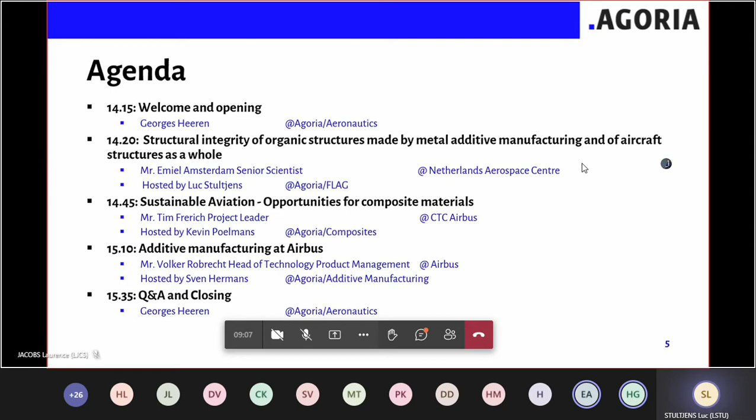The Flemish Aerospace Group is an innovative cluster of about 75 members, split over educational institutes, centers of knowledge, and small, medium, and large enterprises. Our ecosystem varies from niche consulting firms to tier 1 manufacturers. Our members are active in structures and systems, engines, and airport and ground support. If you're interested in joining our business group, our contact details are on the last page of the presentation.

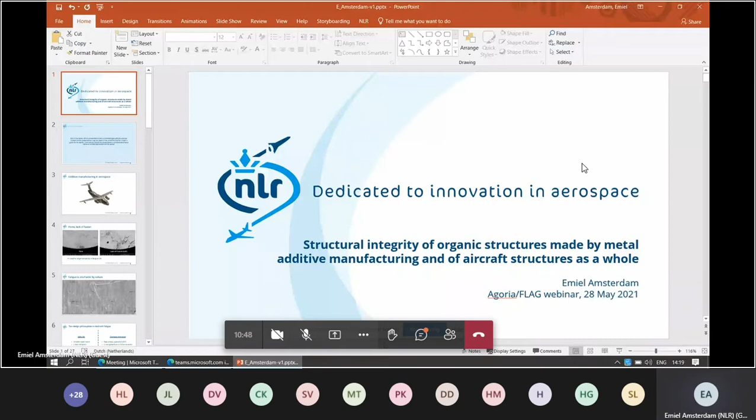The title of the presentation is Structural Integrity of Organic Structures Made by Additive Manufacturing, and of Aircraft Structures as a Whole. As most people will know, this is our release statement.

Additive manufacturing is growing in popularity, especially in aerospace, because of the lightweight opportunities it provides, and also the opportunity to create parts with added value. Those are the things that are most interesting for additive manufacturing, because we're not going to print an entire plane. Instead, we're going to make parts of an aircraft that have added value, using a technique that is more expensive than conventional manufacturing, but which lets you create additional lightweight benefits or added functionality to a product.

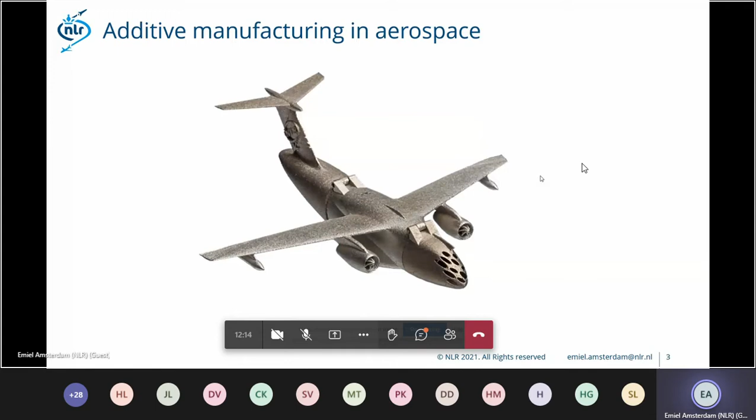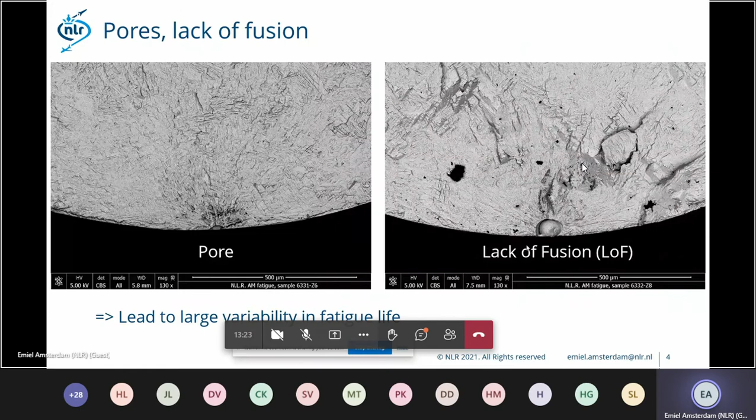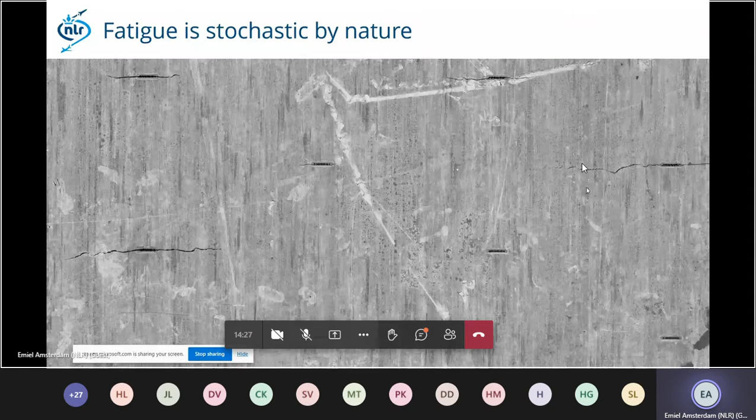So how do we deal with fatigue in conventional design approaches? We can use safe life, or we can use damage tolerance. Safe life, I think one of the first design methodologies, is where you usually look at crack initiation, and then if the crack has initiated, that's the end of the life of the component. You use some kind of safety factor to ensure that the part doesn't fail in service, and from the mean life of the SN curve, you create a safe curve for the design. You typically use smooth specimens to determine the SN curve, that's the cycles versus stress curve, to design the component, and Miner's rule is used for variable amplitude fatigue.

However, in the past there were still fatigue failures in aerospace, and it was recognized that although there were some factors of safety, that safety was not always guaranteed. So already at the beginning of the 70s, they came up with a damage tolerance design philosophy, where they assume that there is a flaw already present in the material and in the structure, and that it grows, and that it grows at a critical location.

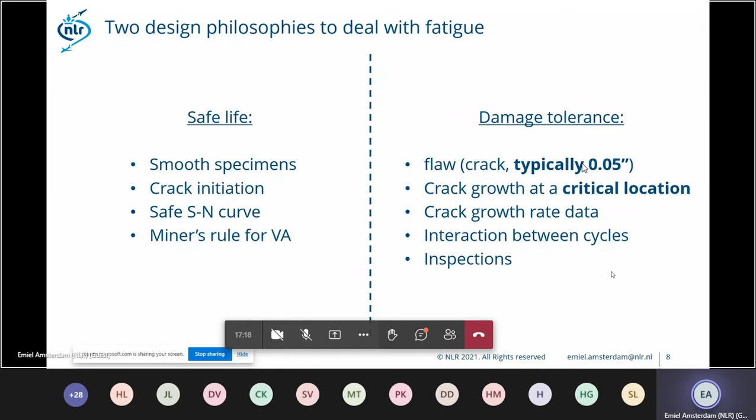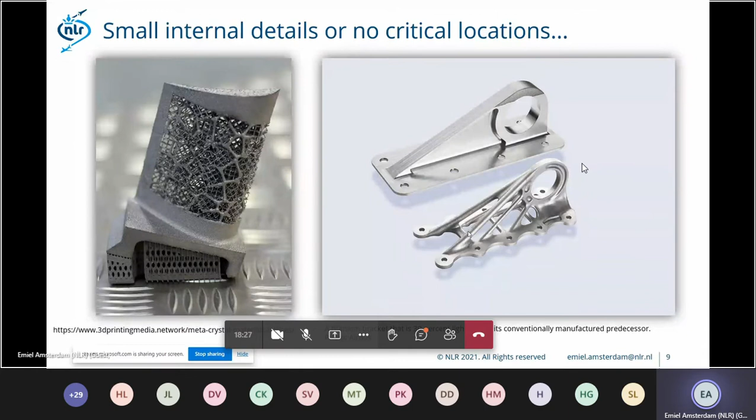And then how are you going to use your damage tolerance approach if there is no critical location? Obviously, for applications with multiple load cases, this does not hold, because you have to have material at one place for one load case and at another location for another load case.

So in reality, you won't end up with a part with equal stress everywhere, but still the critical locations are not always very obvious. Whereas in other designs, where you have a hole or something, it's more obvious that around the hole is a critical location. So how do we deal with that?

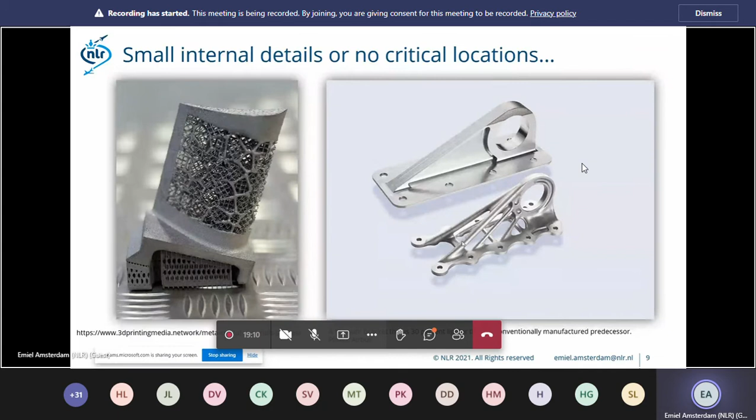So that's basically the question: which design rules should we implement in topology optimization algorithms such that the optimized shape is damage tolerant?

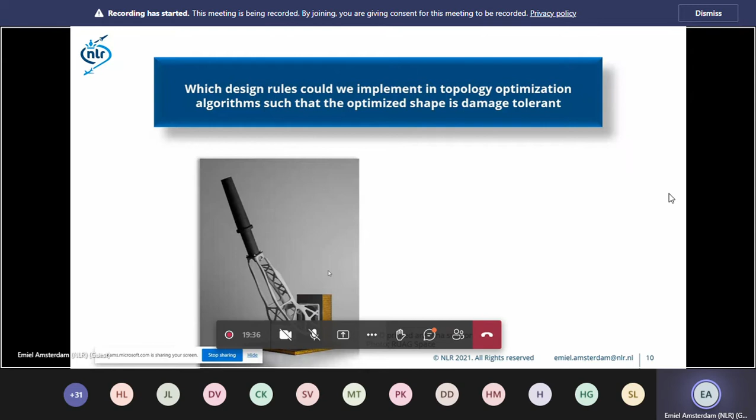And here you can see an antenna. How do you basically guarantee that such a structure, if one of these connections fails, you don't get sudden collapse of the entire structure? For example, if you look at this, you would want to have a structure which is more like the game of Jenga, instead of a house of cards, where if one member fails, you get collapse of the entire structure.

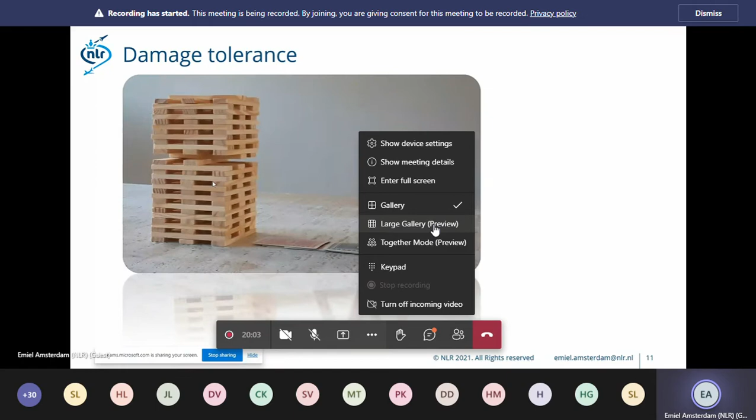But you would like a structure that is more damage tolerant in a broader perspective. When we speak about damage tolerance, we have these characteristics of a critical location and a 1.27 millimeter assumption for a starter crack. But if you look at the broader perspective, damage tolerance is also about how good a structure is at dealing with damage that is inflicted or introduced in the structure. So for additive manufacturing, we would like to have a structure which is more like the game of Jenga, where we can introduce some damage and nothing happens to the structure.

Same applies for the other structure. Here you can see a lattice structure inside, in this case an open lattice structure inside a compressor blade, as an example. How can you ensure that widespread fatigue damage isn't everywhere and then you get sudden failure by linking up of all these

damage accumulation. So is this something that can happen? Here you can see an example of this in a real case structure, an aircraft structure, where there was multiple site damage, and it linked up after many pressure cycles in the cabin. Famous incident.

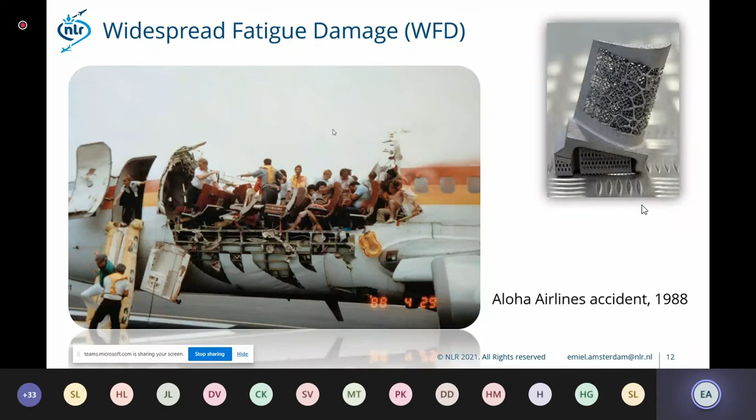So how can we deal with that? To investigate that, we looked at fatigue in stretch-dominated multiple load path structures. This was a master thesis project for a student that was at NLR. And we started with a very simple structure, because we could immediately go to a very complex structure, but we can't learn that much from it.

So we want to start with a simple geometry, which is stretch dominated. And if one member or one strut fails, then the structure is still stretch dominated, because all the members are in tension.

So for this example, we looked at 3 different specimen geometries: one with a single strut, one specimen with 9 struts in parallel, and one with 81 struts in parallel. And they all have an equal cross-sectional area, so the force is the same.

So that's what we want to investigate: how good is the structure in maintaining that force over a long period of cycles? And they also have equal surface area.

As I mentioned before, fatigue is a stochastic process, so usually fatigue cracks start at the surface, and especially for additive manufacturing they start at the surface. And if you have more surface, there are more possibilities for cracks to initiate. So fatigue life is also a function of the area, the surface area of a specimen.

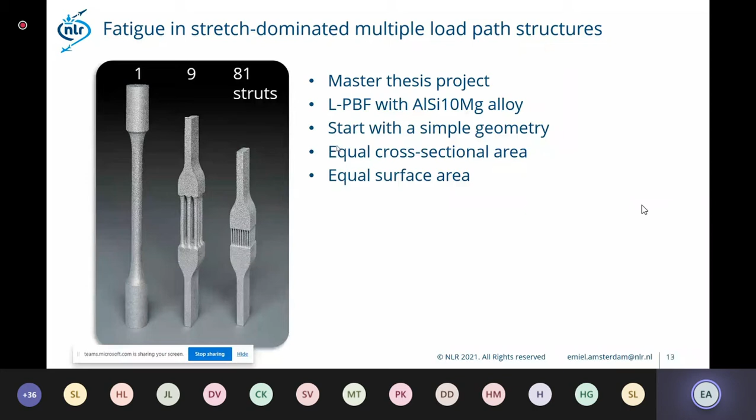So we tested these in fatigue, and these are the results. Here you can see the normalized cycles to failure. We normalized all the results by the average of the single struts at 140 megapascal maximum stress. Here are the results: the number of cycles to failure on the vertical axis and the maximum stress on the horizontal axis. As the maximum stress increases, the number of cycles to failure goes down, as expected.

But these are the results for the single struts, and we see that the results for the 9 struts specimens are decreasing, and that's quite a remarkable result—that the life, if we increase the number of struts, the life decreases, and if we go to 81 struts, it even decreases more.

While the load on all the specimens and the cross-sectional area is the same, as I mentioned before, that's remarkable. Here you can also see that for the single strut specimens, 3 results are almost the same, but there is some scatter—occasionally there is one specimen with an extra low life.

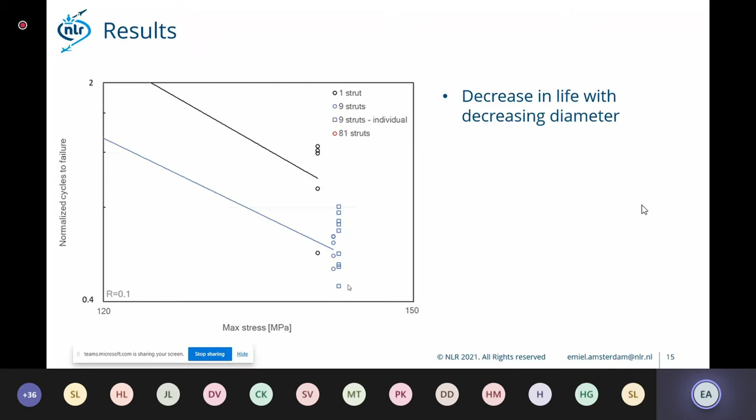What can also be noticed is that the average life of the redundant structure, the 9 strut specimen, is slightly lower than the average of the single struts, and the scatter is lower. That's also something that you would expect.

So in the 9 strut geometry, if one strut fails early, then the entire specimen doesn't fail yet, but the load on the 8 remaining members is increased, and with that increased load, the fatigue life decreases. So it is expected that the fatigue life of the 9 strut geometry is slightly lower than the average of the individual members, but also the scatter decreases due to this load sharing.

So this is what we would expect if we use a redundant structure, that the scatter is much less because the load is shared once one member is failing.

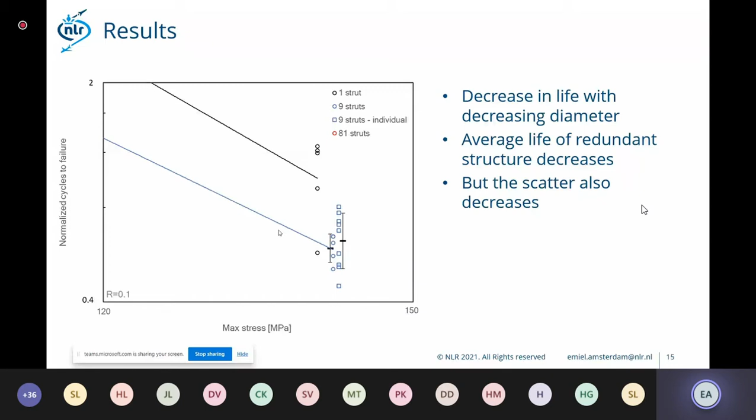So this is already a good result, but we still have the difference in life between the different diameters. That's something that we have to investigate further.

This is done in a project which starts in September by another student, and he will investigate the origin of the size effects for additive manufactured materials and conventional materials.

And we use other alloys, and we use complexer structures, so that in the end we have some design rules which would guarantee such a structure as this antenna, that it's damage tolerant. So if, for example, this very small strut is missing, that it does not lead to direct failure of the entire structure.

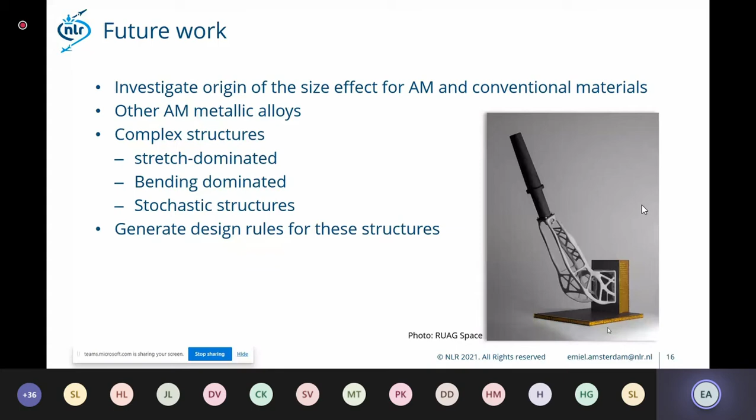So that's also what we, for the additive manufacturing and components, consider - those things of damage tolerance and how do you design for it.

It's also a similar topic for the aircraft structure as a whole, because in the future we expect that the structure will be more organic, and we use also shape optimization software for those entire structures. So it's basically a similar problem, but on a large scale.

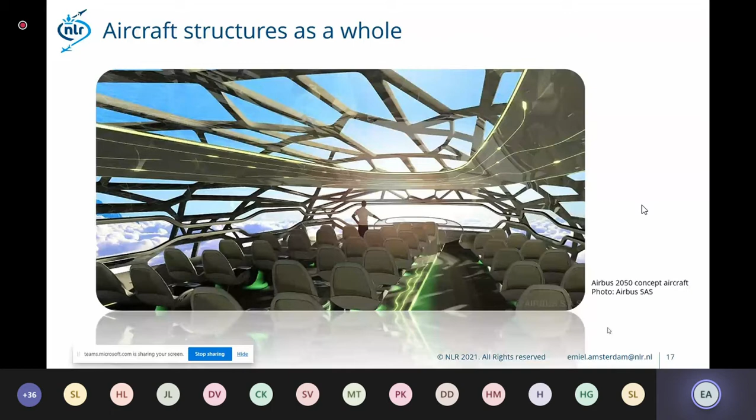So we have some factors that are also influencing the damage tolerance philosophy for large scale structures. One of those is indeed the introduction of additive manufacturing, of new production techniques.

The other one is the increased use of optimization tools, and you can see that also in the EU calls. The push to circularity, both on resources, materials, but also on CO2 emissions.

And there is still a push to lighter aircraft structures. That's also seen in the clean aviation strategy.

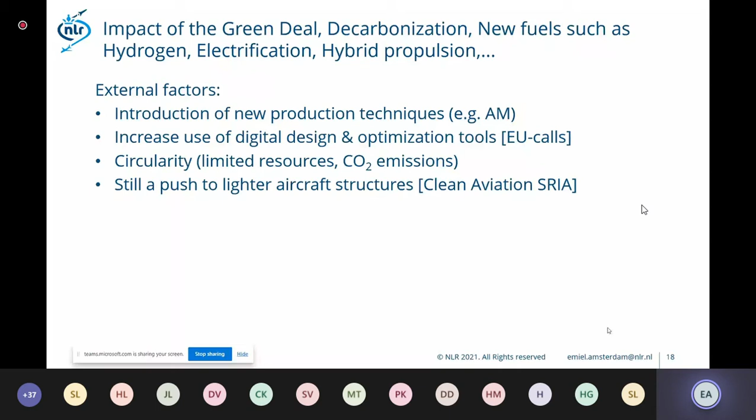So to incorporate optimization tools and to use integrated design and manufacturability, to apply that in the design tools, we see a need for a clean sheet holistic structural design and integrity approach, and I will explain what we mean by that.

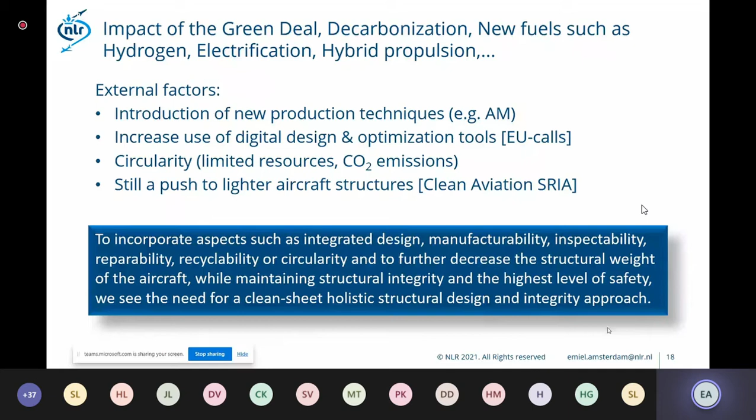So we wrote a white paper on this, on our ambition and the need for this clean sheet holistic design approach, and we made a white paper on that, and you can see it on our website. We published it last month.

It basically says if you want to use a holistic multi-criteria design approach, you can optimize things. Obviously, you want to optimize performance, passenger comfort, all these kind of things, but also manufacturability, repairability, recyclability, environmental impact. You want to look at costs for manufacturing or ownership, total cost.

But in all these cases, you have to account for time-dependent degradation mechanisms, and one of those is fatigue initiation and crack growth. So that's the structural integrity part of that.

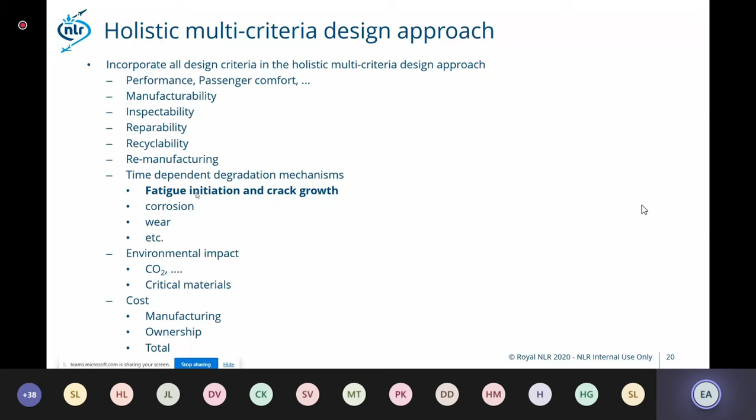And we want to introduce a single fatigue design philosophy for structural integrity.

As I mentioned before, the two are now separated. We still have safe life for crack initiation and crack growth for the damage tolerance, and we think that is two pieces of the same medallion. So we should really have one single fatigue design philosophy for structural integrity.

And some of these design tools that we are using are still from the 60s and 70s, where we have little aid from computer calculations or simulations. And we also showed that structural risk analysis of single and multiple load path structures showed significant conservatism in the current damage tolerance design methodology.

So we think that by introducing a single fatigue design philosophy that's based on physics and probabilistics, and acknowledges the initial discontinuity state distribution - basically the defects, rogue flaws or other things inside the structure - that we can use that to determine the life and the structural integrity of the aircraft.

And this gives a more benefit from the strict quality assurance systems that are imparted at many companies and factories.

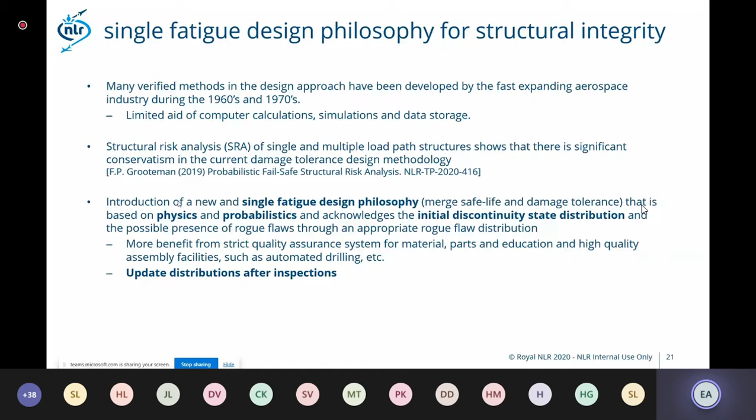We could also use information gathered afterwards. During the life of the structure, we collect information, but we don't always use it. If you use a probabilistic approach and do inspections, you can use that information to verify your initial discontinuity state distribution. That's something we think is useful, and we could transition to a structural risk analysis.

Now we use a lot of safety factors, but we don't quantify the risk. We just assume the factor of safety is sufficient, and historically it's proven sufficient in most cases, but sometimes we still see cracks in our structure, and there's a need for repair, or parts fail. So it's not always safe, though the factor of safety is not always sufficient. If you assess the risks, then you can reduce the factor of safety and still maintain the current level of safety.

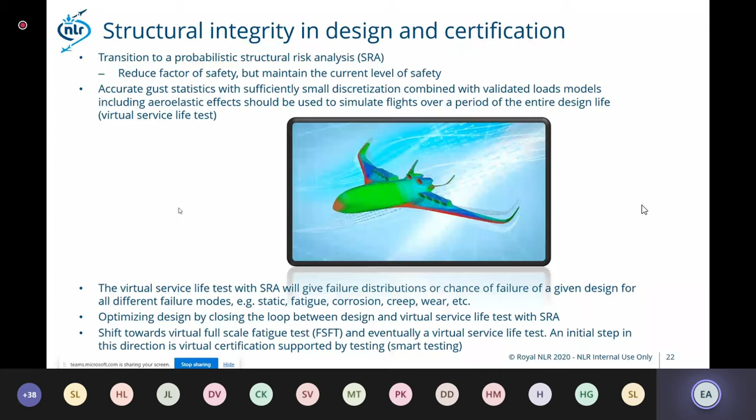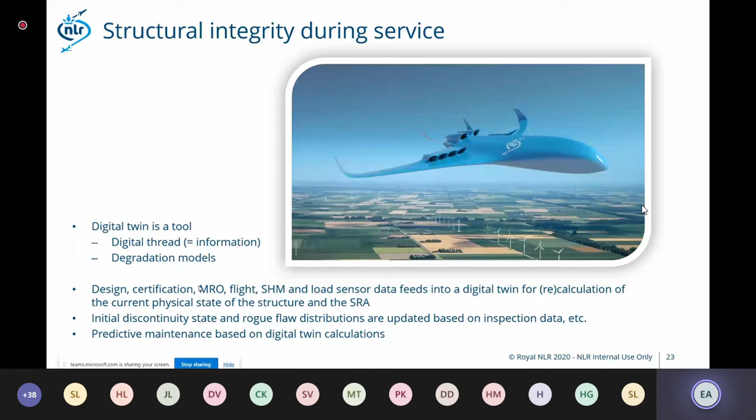For material selection and development, we see that using such a design approach will result in some kind of hybrid structure, where metals are used at places where they are best, and composite materials are used at other places where they are the best choice of material.

For metals, we still see a lack of relationships between mechanical properties and fatigue crack growth. For example, when you look at fatigue crack growth of annealed materials, such as aluminum annealed, the crack growth rate is exactly the same as for a T7 heat treatment. Where you see the difference is in crack initiation. But if you apply a damage tolerance approach and already assume a flaw or crack of 1.27 millimeters, then you only have crack growth, and you can choose between annealed material and T7 material. In reality, T7 is used because those typical flaws are usually not there, and you get the benefit from the high strength of the material.

But the physical relationships between these properties—the mechanical property, the tensile strength, crack initiation, fatigue, and crack growth—they are not really there. That's something we want to work on.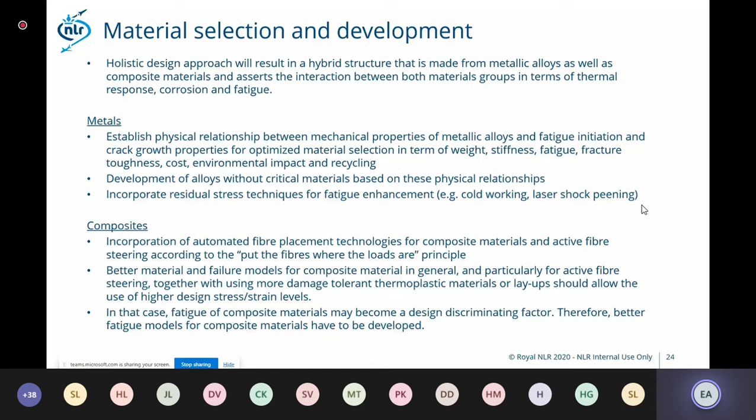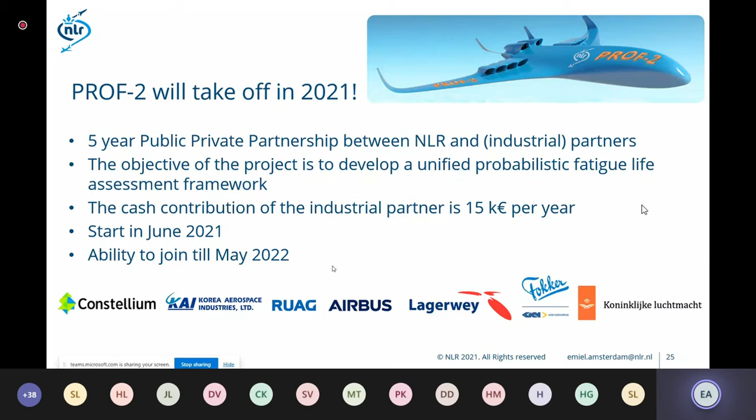So all these things we want to investigate further in our Prof 2 project, which will take off next month with the partners indicated below: Constellium, Kai, RUAG, Airbus, Lagerwey, which is a wind turbine manufacturer, and Fokker. The total budget is about 1 million euros, and the cash contribution of the industrial partners is 15k per year. So there's still the opportunity for companies to join up to next year.

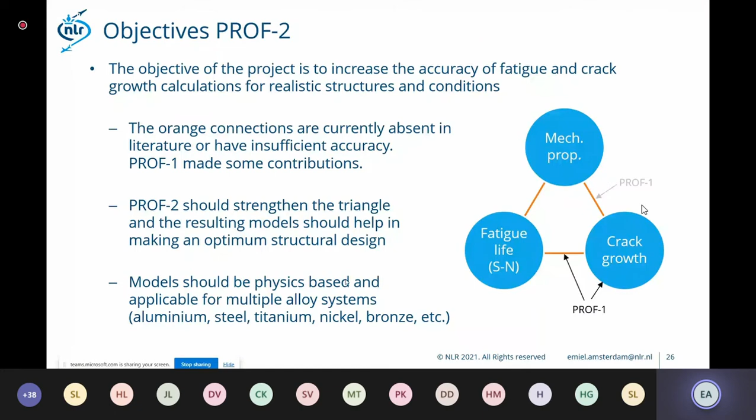As I mentioned, we will investigate the relationships between the mechanical properties, the static ones, and the fatigue life and crack growth, to really have better design rules for metals, and then also for variable amplitude fatigue. It should be physics based and applicable to multiple alloy systems. So that's it.

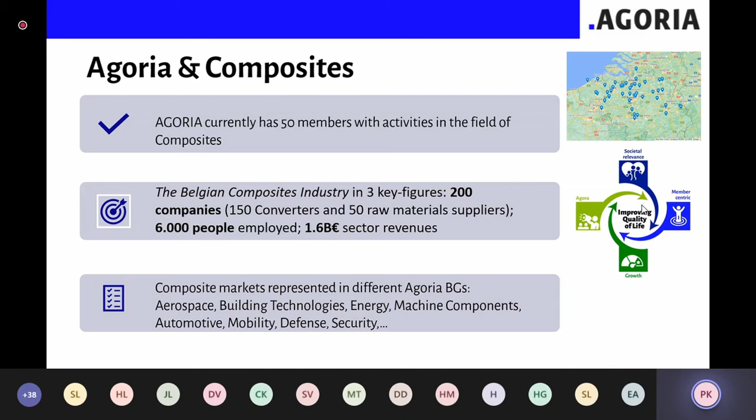And so if we take a look at... I hope you can still hear me, because... I'm sorry. No, it is okay, Kevin. All right.

For Agoria Composites, we believe that a closer collaboration between national and international stakeholders is really necessary. And so we strive to represent the Belgian stakeholders on a national level, but also on a European level.

Because we are also embedded within the umbrella structure of EuCIA, the European Composites Industry Association, we want to act as the unified voice for this sector.

And for this, we gather the necessary information and share it with our members. And we try to make sure that the activities organized around composites are streamlined.

The fact that we are here today in a webinar joined by 4 business groups is a very nice example of how we strive to facilitate the connections between technology and market. Of course, this is all with a higher goal to drive growth and business development.

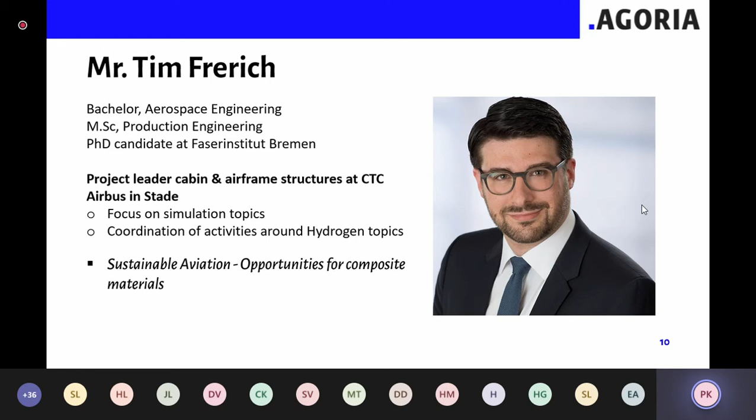Thank you very much, Kevin, for this nice introduction, and also for the invitation and the possibility to share our thoughts on this topic.

Can everyone see my presentation? Yes, we can. Thank you very much. Okay, so I want to talk about sustainable aviation today and the opportunities for composite structures in this emerging sustainable aviation.

Before I go into that topic, I just want to very briefly, in just 2 slides, introduce what the CTC is. CTC, as you already mentioned, is a 100% subsidiary of Airbus Operations.

We have more than 50 employees, of which 35 are engineers, and additionally more than 25 students occupied at the CTC, working on lightweight structures with, of course, a focus on composites.

We're not just doing engineering, but in addition to this, we also have a shop floor, 2,500 square meters, fully air conditioned, where we can produce parts and do experiments.

We are integrated in the Airbus technology programs, but we also cooperate with suppliers and other development partners, also outside of the aviation industry, everywhere composites are applied.

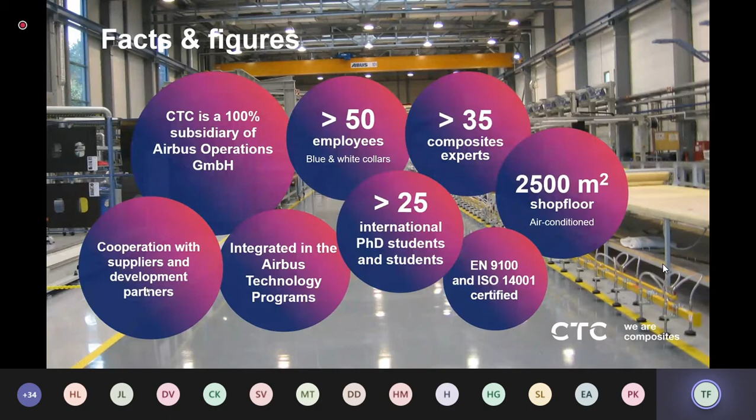We offer services in 4 business fields. The first is innovation, where we do research and development of new structures and new technologies.

The second is our field we call solution, in which we transfer those developments into industrial solutions for our clients.

The third field is our production. As I said, we have our own shop floor and do prototype and small series production for all kinds of applications in the fiber reinforced plastics world.

Our newest and most recent addition is the business field of education, where we offer trainings for our customers to make them ready for processing composites and designing composite parts.

In the field of innovation, where I'm situated, we have occupied ourselves with sustainable aviation and what opportunities for composites arise in this field. I would like to share now our thoughts on this.

As a short introduction, I would like to talk generally about what kinds of sustainable aviation are possible. We see there are 3 options: the first is battery electrics, the second hydrogen, and the third sustainable aviation fuels.

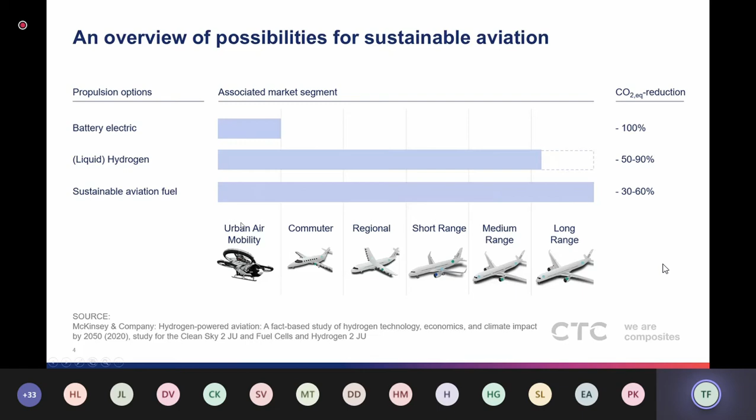So one opportunity for composites here is this creates a bigger push to more lightweight design where more opportunities for composites rise. But I will now focus a little bit more on battery electric and liquid hydrogen flight, and I will go through the market segments from low range urban air mobility to the long range.

The vertical takeoff and landing offers interesting opportunities for composites because, in contrast to a fixed wing aircraft, the complete weight has to be overcome by thrust. So the impact of weight on fuel consumption in this vertical takeoff and landing stage is much higher, and there's a very big push for lightweight designs.

Furthermore, these lightweight designs can be applied virtually everywhere in the aircraft. The electric engine is not as warm as a combustion engine. The copper spools maybe get some heat, but overall CFRP can be used in nearly every part. So this is seen by virtually every urban air mobility producer or company right now.

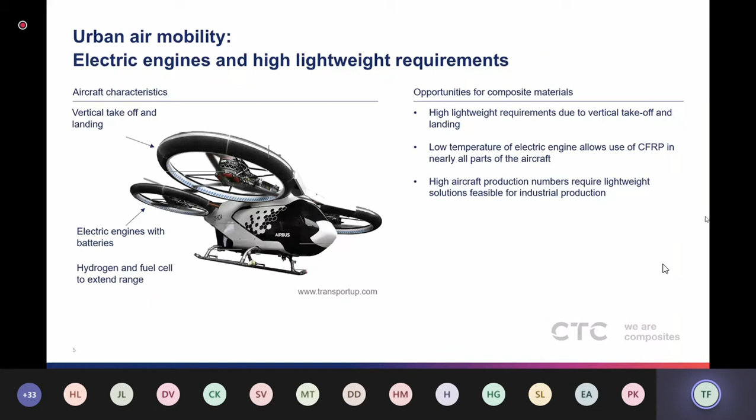So if we increase the range a little bit and go to something like a regional aircraft, there, as I previously said, batteries are no longer an option because the energy density is too low, and there hydrogen will have to be used for sustainable aviation. An aircraft might look like this with hydrogen.

In contrast to the kerosene tank, which is an integral tank—meaning there is no tank, the wing structure is the tank—cryogenic tanks at minus 253 degrees Celsius need insulation and a dedicated tank structure, and this increases the weight of the aircraft.

This creates opportunities for CFRP to be used in other aircraft structures currently made of metal. For example, in regional aircraft the fuselage is often metal and can be substituted with CFRP to compensate the weight, or the tank itself can be made out of CFRP to reduce weight.

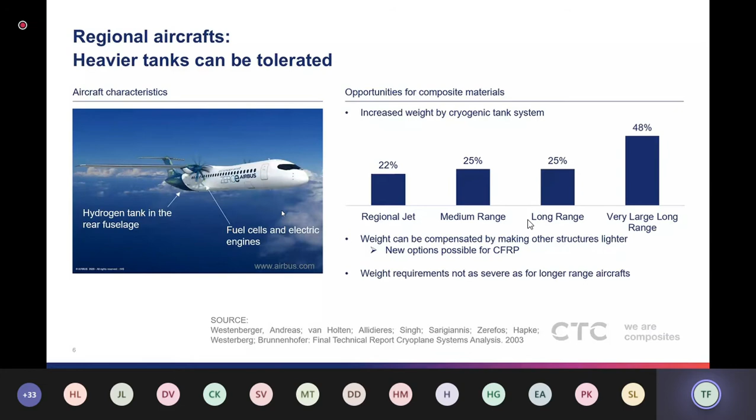For regional aircraft, as shown here, this is not strictly needed because one can live with a relatively heavy tank. But if the range increases, the lightweight requirements on the tank increase, because the tank structure is carried over a longer range.

This can be shown with the gravimetric index, which shows the percentage of fuel mass on the total system mass. Here the required gravimetric index for several aircraft is shown. We can see this increases drastically from short-range commuter or regional aircraft to short-range, medium-range, and long-range aircraft. In these aircraft, composite tanks we think will be necessary to store the cryogenic hydrogen.

There are, of course, no cryogenic hydrogen tanks for aircraft yet. So to identify specific problems, challenges, and also the opportunities it presents—how much weight can be saved—we at the CTC looked at the space industry.

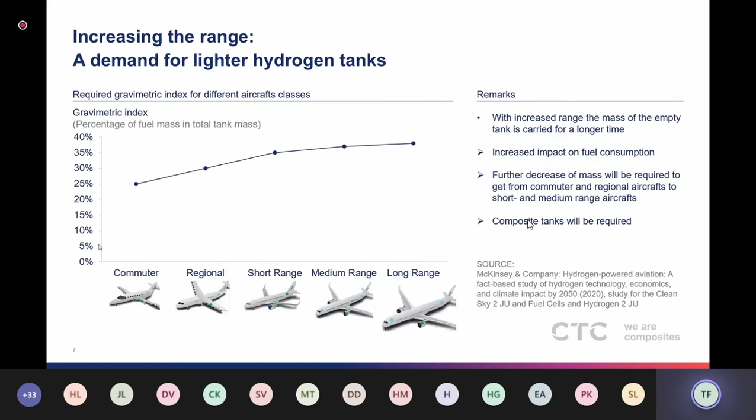The first large-scale tank we know of is 2.5 meters in diameter and 4.8 meters in length, developed by McDonnell Douglas in 1987 for the DC-XA Delta Clipper, which was never produced, but the tank was produced as a prototype. There's not much information available about this tank, just that it was made out of prepreg and was successfully tested in ground and flight tests. This shows that it's in principle feasible to have a CFRP tank.

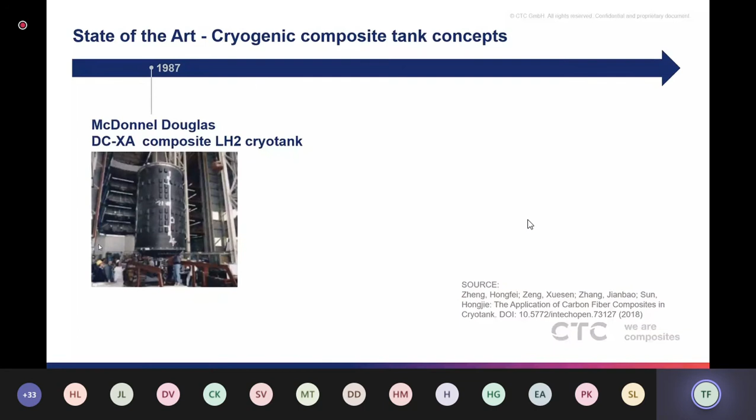Another tank was produced by Lockheed Martin for the X-33. This one is 8.5 meters long and 6 meters wide, also of substantial size. Here a sandwich construction was used with an inner tank top face, an outer tank, and honeycombs between them to act as a stiffener and also as a thermal insulation barrier.

During testing, the excessive temperature difference of minus 253 degrees Celsius caused different thermal expansion in the fiber and matrix material, which caused microcracks in the inner face sheet. This allowed hydrogen to permeate through and collect in the honeycomb core, where it evaporated, the pressure increased, and the top face delaminated, destroying the tank. This indicates one of the major problems of composite cryogenic tanks: the occurrence of microcracks in the tank structure, which allows hydrogen to permeate.

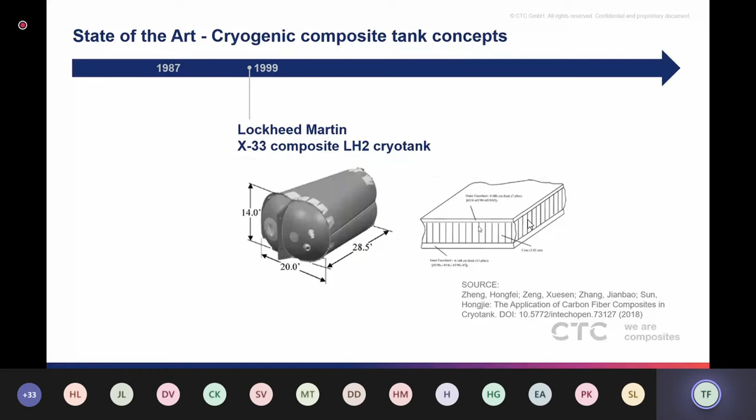Based on these results, in 2004 Northrop Grumman built another prototype of a CFRP hydrogen tank for the Space Launch Initiative program. Here three innovations were used. One was that thinner carbon plies were used, which helps reduce the number of microcracks. I will come to this thinner ply topic a little bit later on again.

Another thing that was done was to introduce an aluminum foil between the inner skin and the honeycomb core as a barrier for hydrogen permeation. And the honeycomb core was subjected to vacuum to suck out any permeating hydrogen.

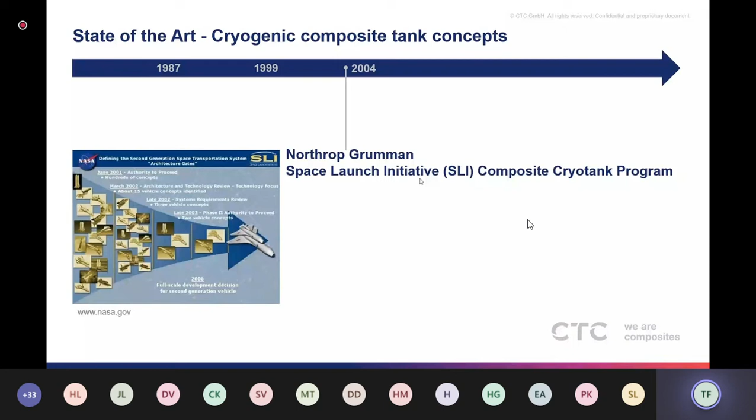These tanks were successful in testing, where after 40 filling cycles the tank still maintained its structural integrity. 40 filling cycles indicates one major difference between aircraft tanks and space tanks: while for space, 40 filling and draining cycles with liquid hydrogen are perfectly enough, for an aircraft this is of course way below the number required—thousands of filling cycles have to be endured by the tank, which has to be considered in aircraft CFRP tanks.

A next tank was produced from 2011 to 2014. In the CCTD program, Boeing, Northrop Grumman, and Lockheed Martin all submitted designs for a liquid hydrogen tank made of composite materials, and the design by Boeing was chosen and the tank was produced. This was made with toughened out-of-autoclave prepreg, also with thin plies to prevent microcracking, and a vacuum insulation around the tank. It was found in testing that the thin plies prevented microcracking, but the permeability was still too high because the porosity of the material, due to the out-of-autoclave manufacturing, allowed too much permeation.

More permeation than specified in the requirements. One thing here is that the production is also an important production process. The curing process is also an important thing to produce CFRP liquid hydrogen tanks.

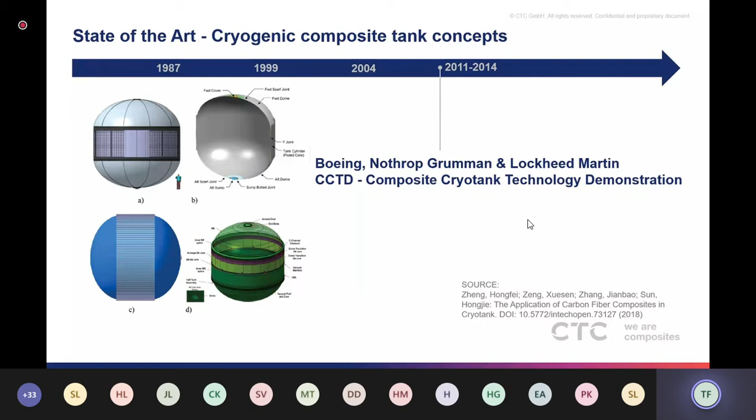All these previously discussed tanks were in the US, but there has also been some development in Europe. In the Advanced Cryotank Research Project, CHATT, in Europe from 2012 to 2015, composite liquid hydrogen tanks were investigated. Four tanks were created: one cylindric with liner, one cylindric without liner, and complex tanks with liner, and a dry wound tank without liner.

The result was that the TRL was assessed to be between 3 and 4, and that was also noted in the report, that Europe is lagging behind the US in this topic of composite hydrogen tanks or composite cryogenic tanks.

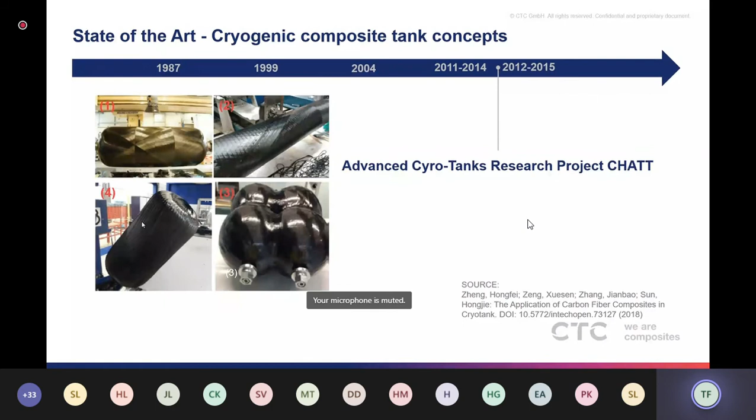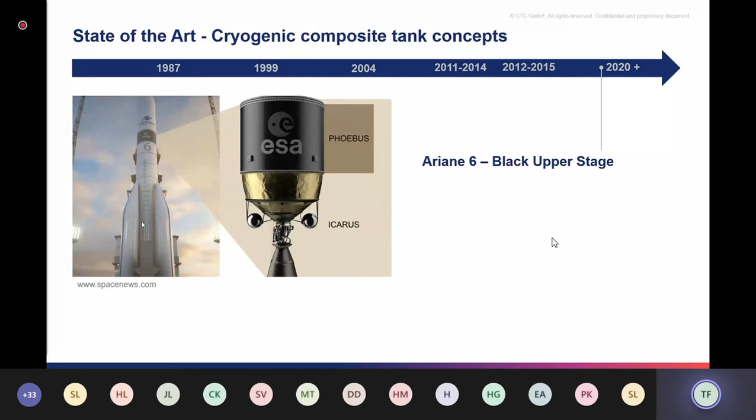So to sum up this overview of the history of CFRP cryotanks, there are great opportunities. All these tanks show that the weight, compared to an aluminum lithium tank, can be reduced by 20 to 40%, which is of course a lot, and allows the weight savings in the tank area, which are required for longer range, or short and medium range hydrogen aircraft.

Another opportunity here is quite untypical for CFRP structures: they are cheaper to produce than metallic structures. This is because for CFRP materials, very efficient production technologies can be used, for example winding processes, which are highly automatic and can produce basically the complete tank structure in one part.

But as I hope I've made clear, there are also significant challenges we have to overcome. First of all, the TRL for CFRP tanks, the technical readiness level, is definitely lower than for metallic tanks, and there's development needed. One of the major issues is H2 permeability by microcracks, also by manufacturing process imperfections, that has to be solved. One challenge is the fatigue behavior, with a much higher number of load cycles compared to the space industry.

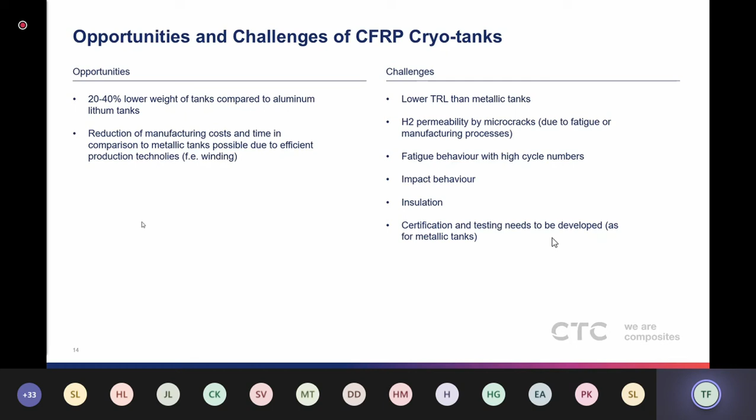But this is also true for the metallic tanks - there is just no certification and testing procedures for aircraft liquid hydrogen tanks. We at the CTC have identified two technologies which we think are very promising to overcome these challenges, and I would like to present them very briefly.

One is the Synply technology, which is indicated here and which I referenced earlier. Synply technology basically uses one effect: if you load a regular ply, here indicated in brown, statically, then it fails at this point, but first delaminations and microcracks can be observed way before this. And if you decrease the size here by half, here by 3, and here by 6, microcracks, so the area where microcracks occur, moves much closer to the failure strain.

You can see this also here. Those structures have combined the same number of fibers in the same directions, but here all in thin plies and here in thick plies, and they have been subjected to the same loads. You can see here that there are no cracks yet in the thin ply structure, and a lot of cracks in the thick ply structure.

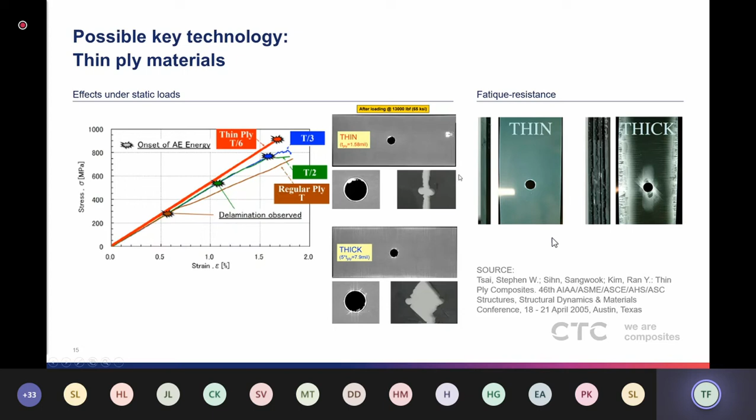And the same occurs also for fatigue: no fatigue-induced cracks visible in the thin ply structure, a lot of cracks in the thick ply structure. So we think that this is a key technology, and it's also been shown in the past that this helps with the microcrack problem. It can be used in laminates where thick plies are combined with thin plies to get this effect, because of course layup times are increased if you decrease the thickness of the plies.

The second technology we at the CTC want to pursue is thermoplastic materials. There have been investigations showing that at minus 253 degrees Celsius, PEEK has a much higher failure strain compared to epoxy resin.

We see here three times. Also used in laminates, here with the cross-ply laminate, PEEK has a much higher failure strain. This helps with the creation of micro cracks due to the CTE mismatch of fibers and resin, and also with the impact behavior. We can see here a trial where a PEEK specimen was subjected to cryogenic conditions.

Subjecting it to cryogenic hydrogen, and after 100 cycles of subjecting it to it, there was no crack yet observable in the PEEK there. So this indicates that semicrystalline polymers are a very promising technology. Maybe not PEEK itself, but we have no material data for other materials yet, and we want to investigate that. And it is, of course, combinable with the Synply technique.

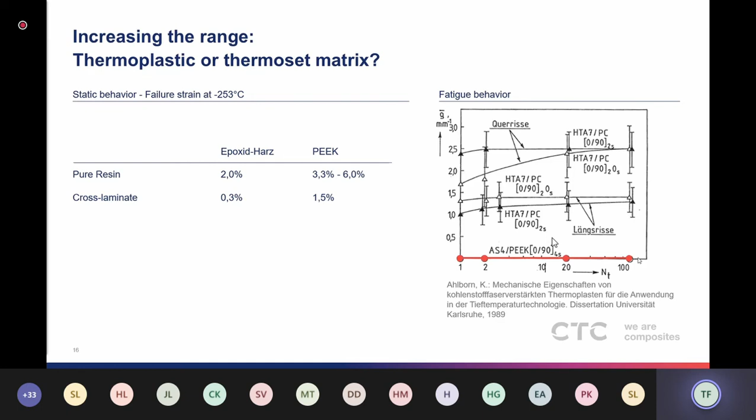That's an approach we want to pursue to get tanks capable of fulfilling the requirements of aircraft. So with these tanks, the range from commuter to medium range can be fulfilled. If we look now into the long range, of course, tanks can be built with composites which will make such an aircraft technically feasible.

But for the long range with the design with tube and wings, the conventional design, there is most likely no business case for a hydrogen aircraft. To get the higher CO2 emission abatement possible with hydrogen, more revolutionary designs might be promising - so, for example, a blended wing body or a flying V shape. With such revolutionary shapes, we can see that there are big opportunities expected in the further away future, also for CFRP structures in this aircraft.

So this concludes my presentation. I've taken slightly too long, I'm sorry for that. But I'm happy to answer your questions. And if you want to contact me, please, it's also possible by email.

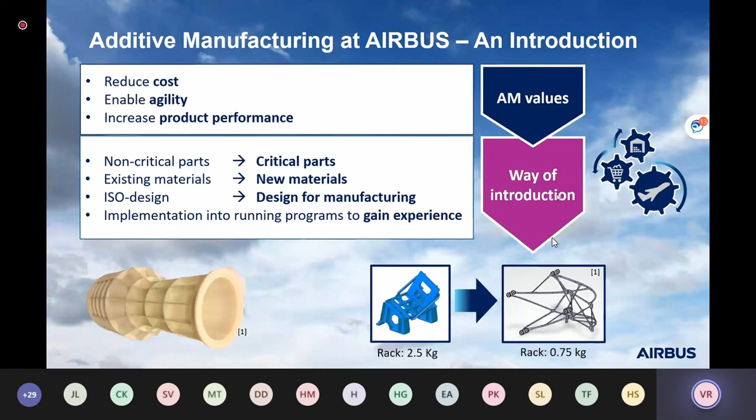Technology scope: starting with polymer techniques, we are using filament technology quite a lot with the Ultem material, which is a PEI mixed with polycarbonate. We're also using SLS technology, mainly with PA12 powder, as well as PEKK powder, carbon fiber reinforced.

For metal technology, we are using powder bed technology, mainly with titanium materials, as well as nickel chrome alloys, also known as Inconel materials. And we're using directed energy deposition processes with filament technology, as well as with powder.

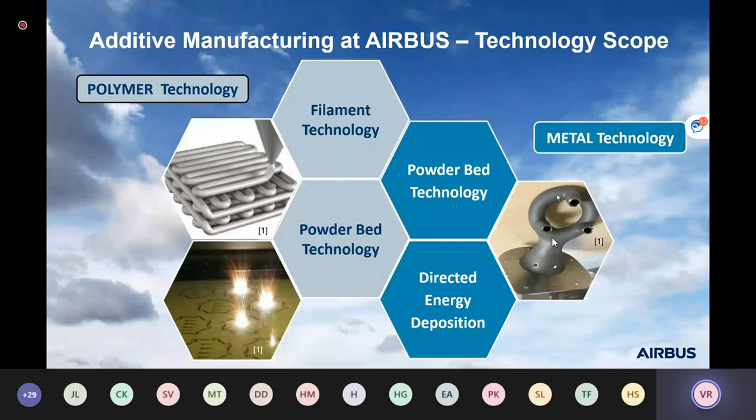When we look at metal, I'll start with powder bed technology first. We are using this kind of technology for our most complex geometries, where we are also implementing the most advanced designs. At the end, we are looking here for weight clearly, and also cost focus.

The picture you see on the right is a double-walled fuel pipe, which we are using on certain areas in the aircraft, and which is a good example of application with respect to complexity. The opposite is the directed energy deposition process with filament.

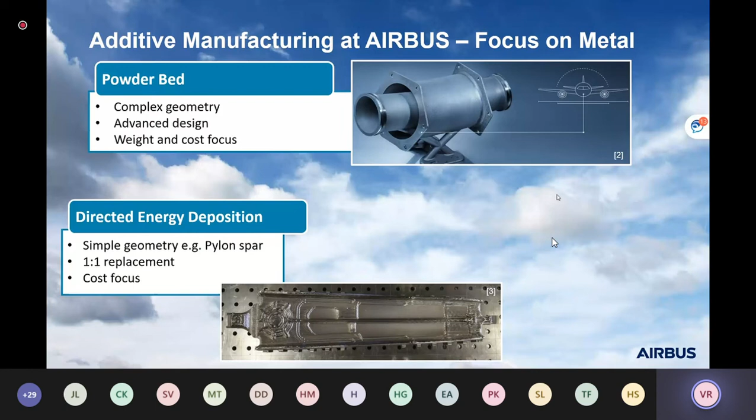At the end, this is a very simple geometry. The parts are usually either forged parts or very simple machined parts. What you see here is a pylon spar.

We are using a one-to-one replacement of the design, and this is purely motivated by cost. There are no benefits in terms of weight, it's simply cost. Then, as I would say, the mixture of technology is laser metal deposition.

Which is at the end also DED technology, but with powder, and we are using this for medium complexity geometry, for example pipe couplings, which usually do not make sense with the other technologies.

We are developing this together with our colleagues from PFW, Pfälzische Flugzeugwerke. There too we're starting with one-to-one replacement, and also here the focus is on cost, as we are using welded parts and machined parts that are usually relatively cost intensive.

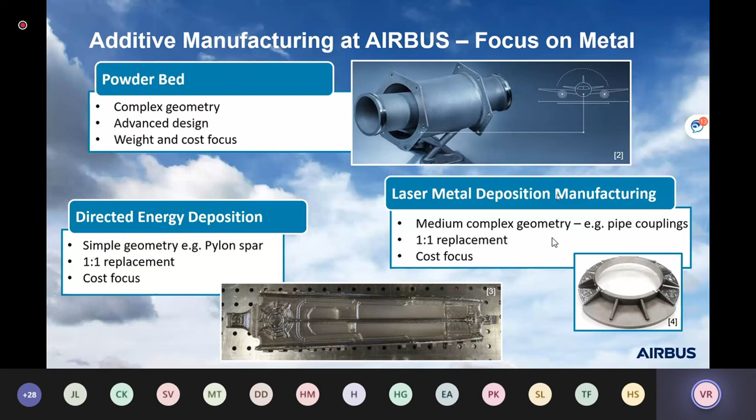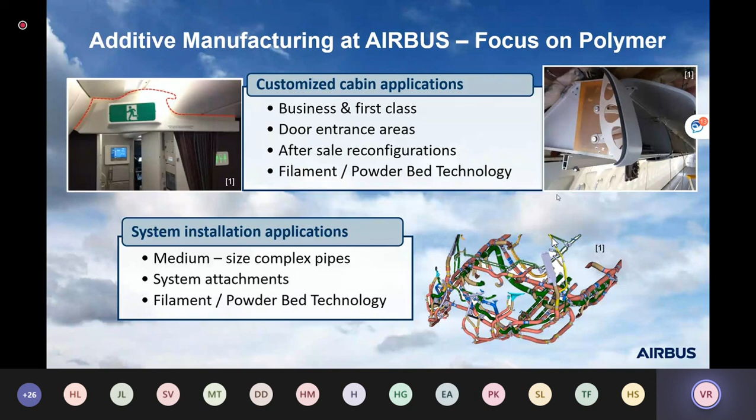Sorry Volker, your slide is not moving. We're still on the slide with the focus on polymers, showing the customized cabin applications. That's not so good, indeed. We'll try to redo it. Now something is happening - you close it. My apologies for that. No problem, yes, I tried to restart. Okay, we see the presentation, not in presentation mode. You're on slide five.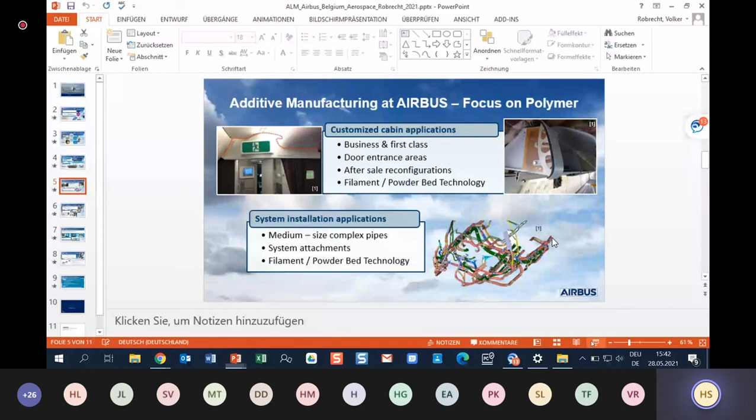You see now business applications and after sales. Okay, thank you. So I will not repeat all of this, so you can look a little bit on the picture. So this is what we have used the parts for.

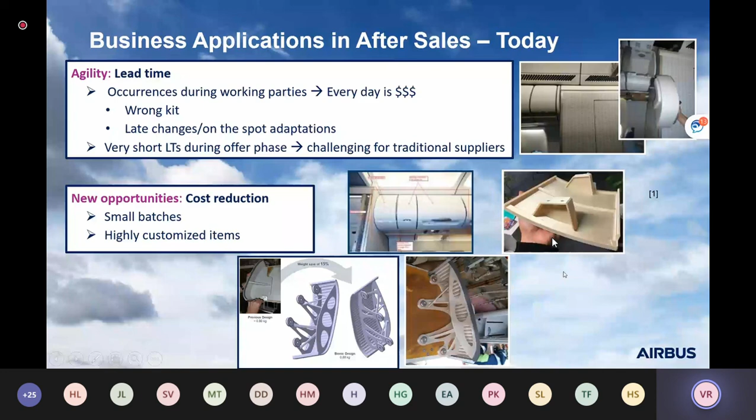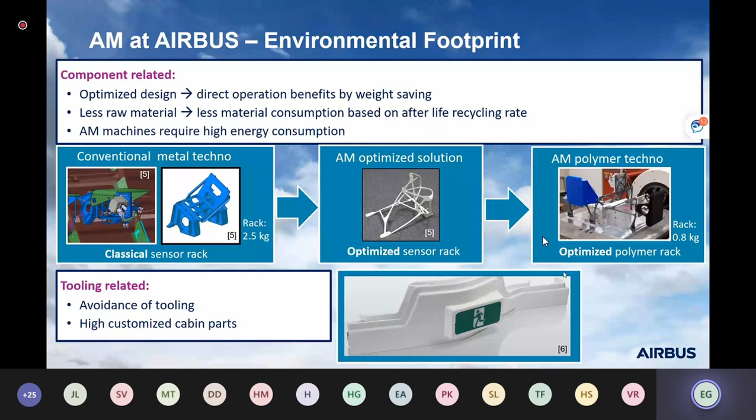Excuse me Volker, it's frozen again, so it's hard to follow your explanation. Sorry, really, my apologies. It's best to go out of presentation mode, just leave it in the PowerPoint, that will probably work better. Try to make it as large as I can. Yes, and interrupt me if it happens again.

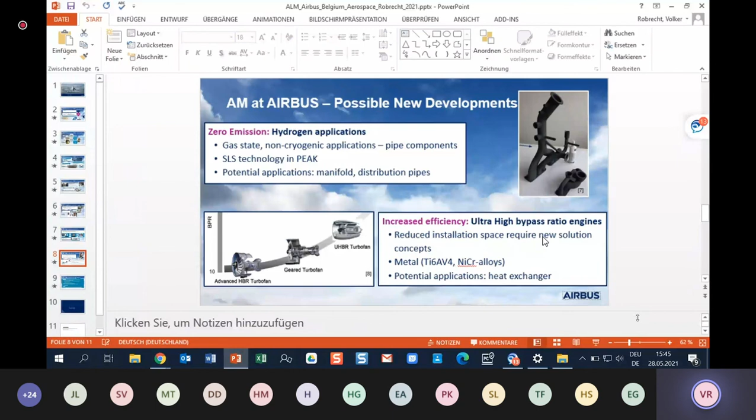Okay, so for the ultra-high bypass ratio, which we're using titanium alloys as well as nickel chrome alloys, and once again, potential applications are heat exchangers as a special, I would say, complex design for powder bed metal technology.

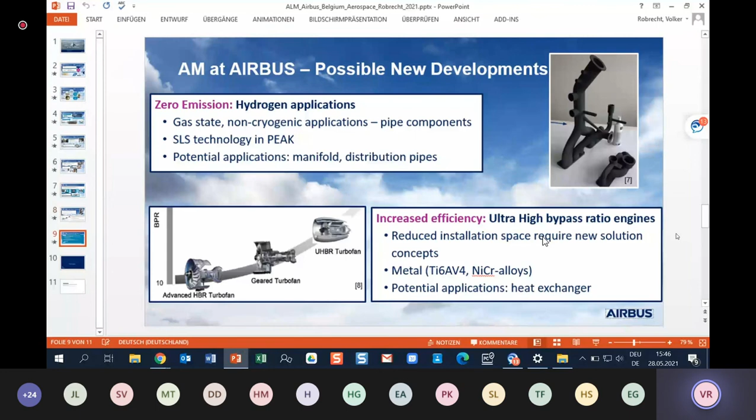So that was mainly it. What are the takeaways and conclusions of the presentation? We're using metal additive manufactured parts, flying and also non-flying parts, right now with powder bed process on titanium as well as Inconel. We are also developing the direct energy deposition technology with filament as well as powder. And we have implemented polymer parts with powder process, polyamide 12, and filament process with the Ultem. So we have applications in series and also after sales business.

The environmental footprint, we see mainly two aspects: the reduced weight on component level as well as the avoidance. Nevertheless, here to say as well, we're not talking about a huge impact. The amount of parts that are manufactured is still very, very low, at least on our running programs. So let's see what happens when we start a new program, and then we can really see what kind of benefit we can bring with respect to the environment.

So as an outlook, we look for our hydrogen application, where we currently use 3D printing for our gas state hydrogen piping systems, and at the end, we want to use it as well for ultra-high bypass ratio concepts, especially for heat exchanger applications. So that was it. Many thanks for your attention, and you're more than welcome to address a few topics and questions to me.

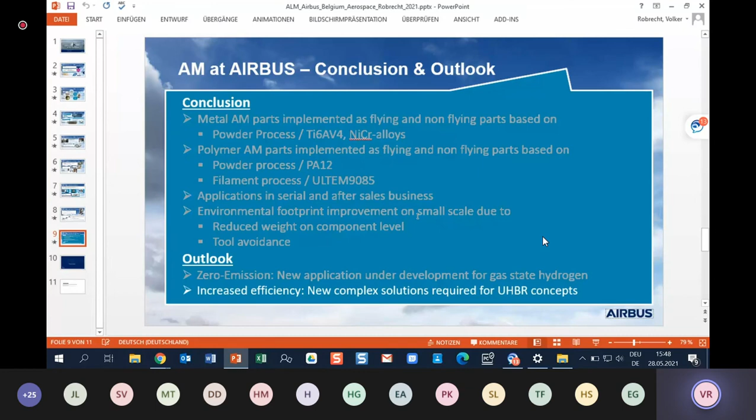Looking at the questions, I will take a question from Andy van Aarschot: for PBF and DED for metals, what's the typical cost target that you look for or can achieve compared to traditional manufacturing methods?

I cannot give you such a figure. We're looking here, we are comparing part to part. At the end, this is really depending on the existing technology. So at the end, this is how we are going to do it.

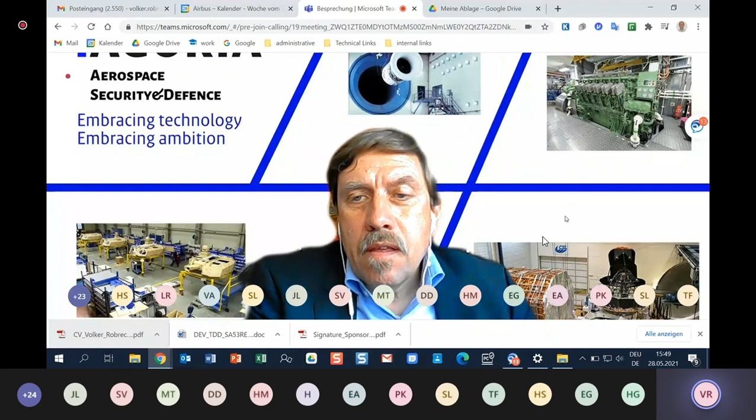Very good, thank you very much. Unfortunately, we have run out of time, so there's no room for further questions, and for wrapping up, it will be difficult.